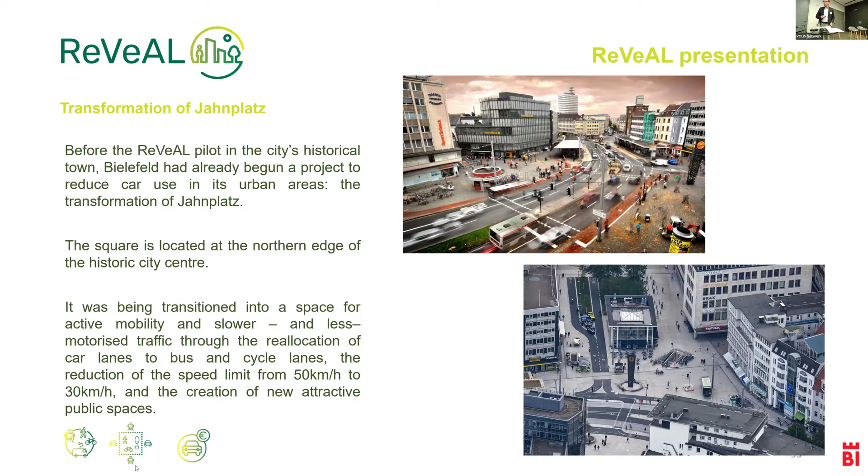The transformation of the Jahnplatz kick-started the transformation of Bielefeld's historic Old Town through a package of spatial intervention building blocks. Both the Jahnplatz and the Old Town projects are in line with the city's mobility strategy, which defines a sustainable model for the development of mobility in the city, and as I already mentioned, aims to reduce individual car trips from 51% share down to 25% until 2030.

The lessons learned in Reveal have given the city of Bielefeld a strong foundation to reach this goal.

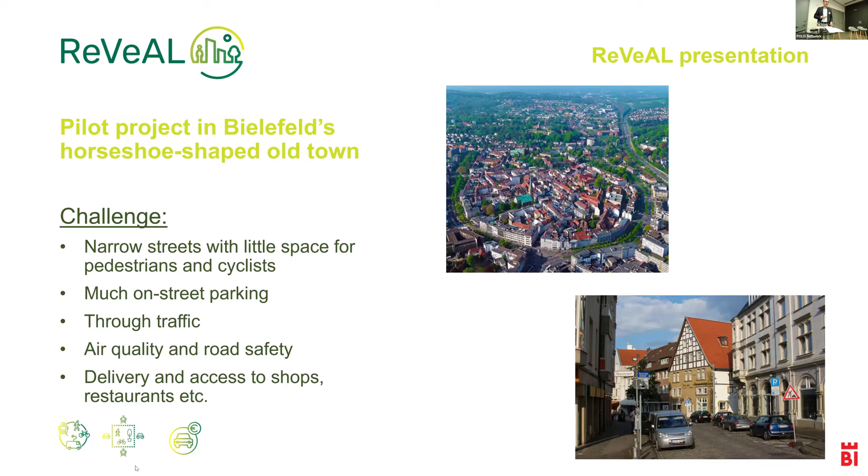The challenges in the Old Town are different from the Jahnplatz: narrow streets with little space for pedestrians and cyclists, very much on-street parking, through traffic through the Old Town, and air quality and road safety issues are very important there. Delivery and access to shops, restaurants, etc. are also very important impacts in the Reveal project, in our pilot.

What did we do? We did a very intensive data collection, coordinated planning, and extensive stakeholder engagement, and a thorough pilot project was implemented in Bielefeld's horseshoe-shaped Old Town within Reveal.

The core element was the participation process in Bielefeld. We started the project and involved all relevant stakeholders of the Old Town, such as the Chamber of Commerce, the retailers, the restaurant owners, and so on, and last but not least, the residents living in the Old Town and the people working there.

We invited them to work with us on a plan for how the Old Town can be changed and made more attractive, more livable, with less noise, less traffic, more green and more livability. Furthermore, we introduced our own project website to reach a wider public for ideas, critics, and feedback, and this in total was a very successful journey for us in the Reveal project.

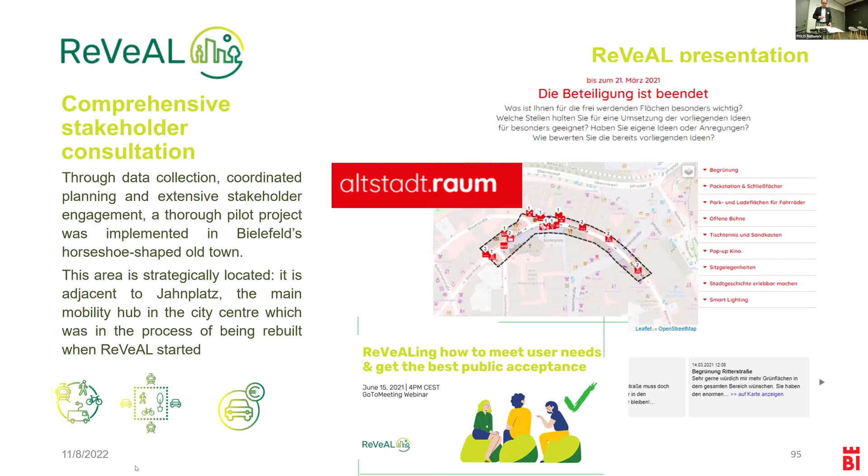Various measures for traffic management and the new use of traffic space were tested out during the testing phase from June 2021 until the end of February 2022. The relevant actors from the public sector, business, civil society, and also the politicians have been very closely involved in the development of the testing phase.

During the testing phase, we also made a lot of interviews with the people on the street. Of course, with the website, we get very intensive feedback from civil society, and with workshops with the stakeholders, we had a very intensive dialogue about the project itself. Here on the map, you can see the Old Town Horseshoe and the six different areas where we implemented different measures.

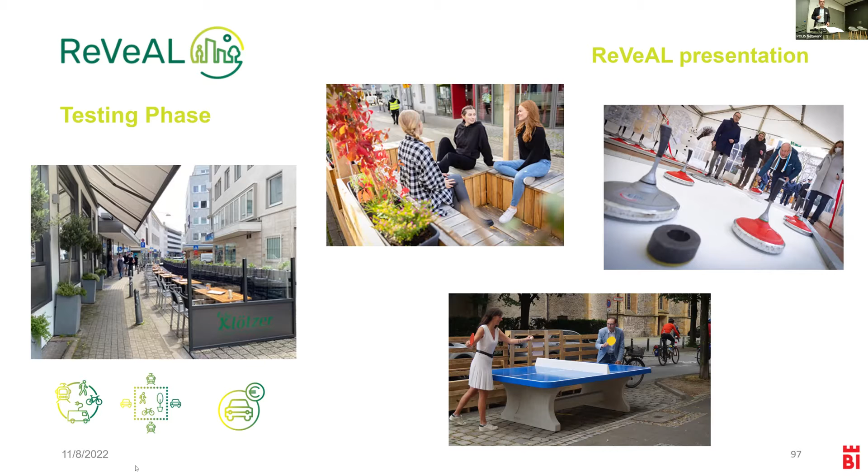Between 2021 and February 2022, several UVAR building blocks were tested in the Old Town, including the extension of a pedestrian zone, redesigned public spaces, reallocation of car lanes to cycling lanes, transformation of parking spaces for other uses - for instance, for seating, bicycle parking, sports, restaurant terraces, etc. - and the introduction of movable bollards to prevent through traffic in some streets. The goal of the pilot was to evaluate the impacts and acceptability of these interventions by the public.

Today, and when I say today, this is now the time after Reveal - the project is not stopped, it has not ended. Some people in Bielefeld believe or hope or think that it has been stopped and that it should be ended and will not continue. Even some people in the media have this opinion, but it is not the case.

I can tell you that we are strongly convinced to go on with our project, and we will start now the next phase - unfortunately after the lifetime of the Reveal project, but Reveal was the kick-off, the starting point for this development. Today, the city is using the results of the Old Town pilot to turn towards permanent changes and expand its UVAR measures.

So we talk not only about UVARs in the Old Town, but also in other areas of Bielefeld. There is an overall strong support from a lot of stakeholders, not all, but many, including restaurants, shop owners and road users, driven by the stakeholder-focused process, because this was the core of the project - to convince the majority of the people, the majority of the public, hopefully the media, also politicians.

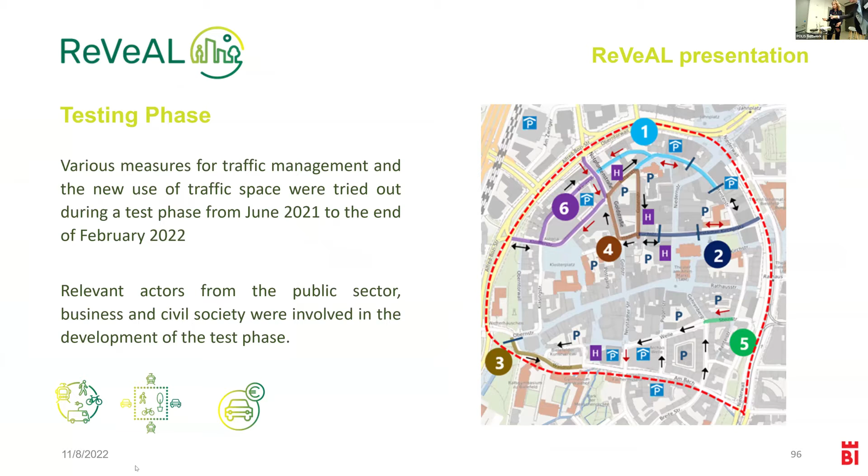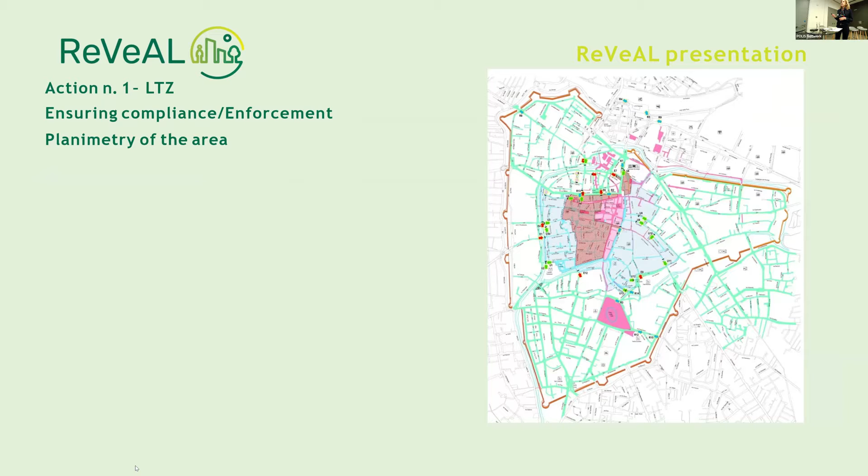Action number 1 regards the LTZ. We have a series of old rules begun in recent years, and these regulatory rules led to a range of subsequent and supplementary changes over time. This is the map of the reinforcement, the perimeter of the area of enforcement of gates in the historic center of Padua, and this is the current situation of compliance and enforcement.

We have studied and developed a draft of an innovative ordinance in our department, especially through the Reveal project staff, which led to the drafting of the innovative ordinance. This was very demanding work. Working tables were held with other sectors of the municipality: local police, environment, and territory. This was an important part of the demanding work, but at present the innovative ordinance is still pending.

Priority has been given to the installation of new cameras, shown in this picture, which not only serve to enforce the prohibition and access regulation in the historic center but will also provide data on traffic flows and vehicle typology, increasing the database for monitoring in the municipality of Padua. It should be pointed out that in our department there is a specific ZTL office with 8 people in charge who deal with this type of work.

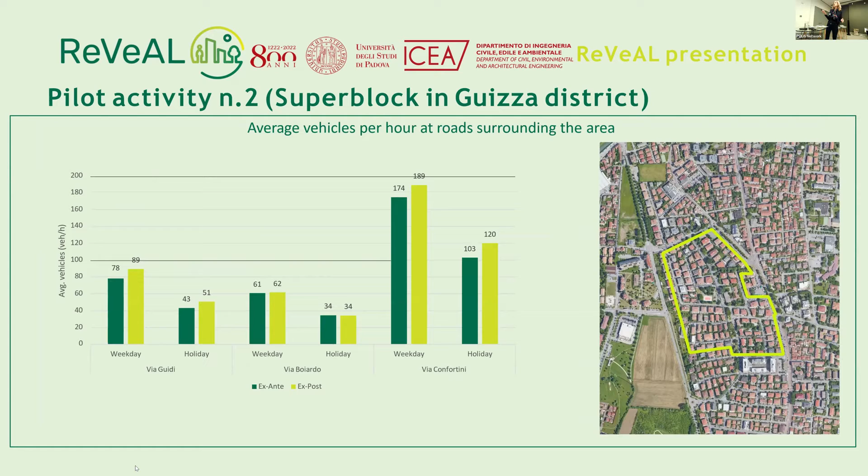This is another slide that explains what I am talking about now.

Finally, everything presented here corresponds to what we have learned with Reveal, and it reflects the thoughts of my colleague, Luca Cohen, and I'm glad to present it to you. And thanks, Laura, for having a sentence that I wrote some time ago.

Okay. Thank you, Raffaella.

Yeah, so another thing, it's true, we had one of the quotes that got pulled out. Whenever somebody said something really insightful, we usually wrote it down somewhere. We had our collection of really smart things that people said. One that came from Raffaella was talking about, we saw this earlier, all of these different departments coming together to work on this. And that was so beautiful because it just didn't happen so often. So just this idea that people were working together, isn't this great?

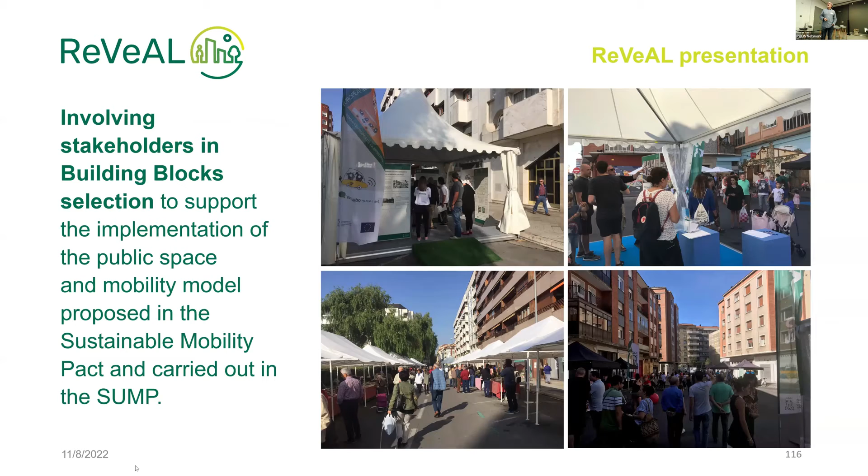From the very beginning, we tried to do it together with the people, trying to involve as many stakeholders as possible in order to select the different building blocks to support us in this transformation of the public space, according to the superblock approach.

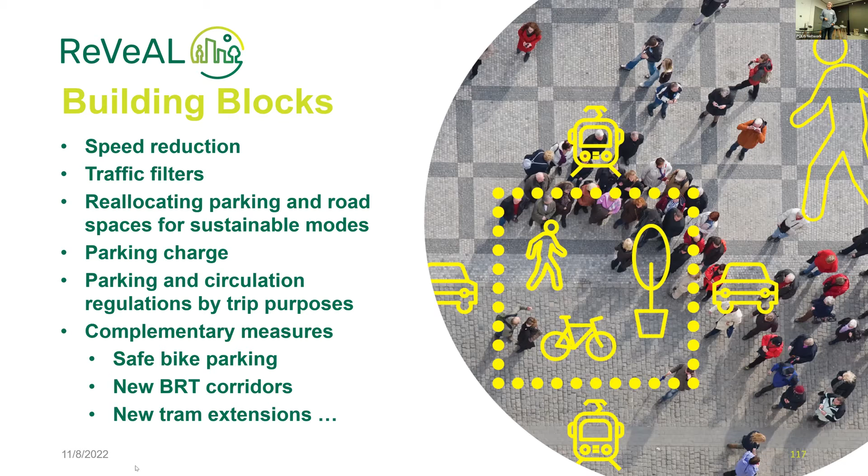Those are the different building blocks that we have tried to apply in the different pilots. We have worked within the project, from speed reduction, traffic filters, to different complementary measures like safe bike parking, a new micro-logistic hub, and so on. So we have a very extensive catalog of the different building blocks that are supporting us in this transformation of the city.

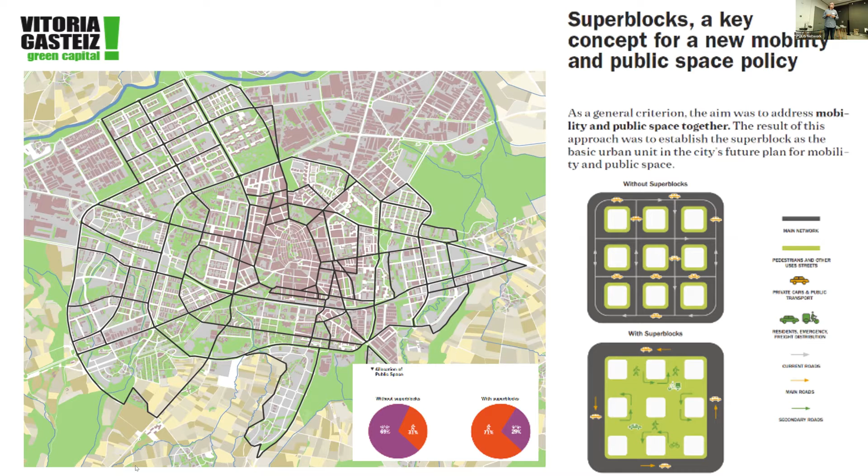What is true is that this is a long-term approach, so it takes long to make it a reality, but we have a clear idea of the city we wanted for the future. And always we have the opportunity to reclaim a street or refurbish the public space, because, for instance, we are implementing district heating in an area, and we have the idea of what should be the redesign of the public space in that area.

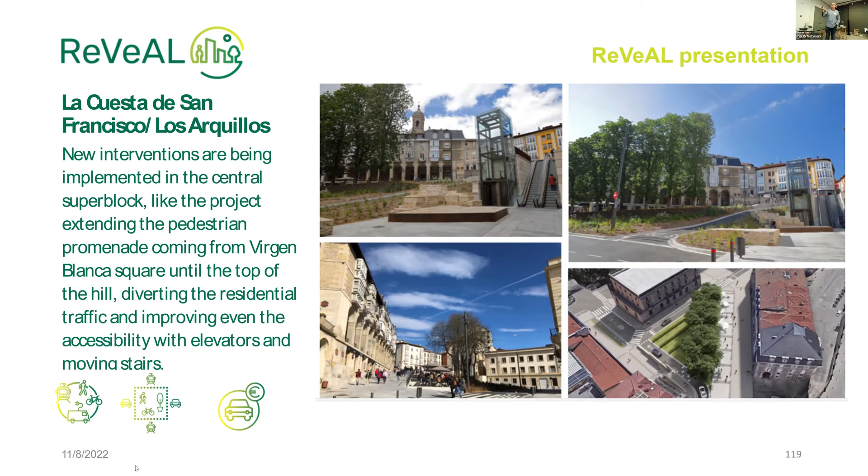And this is the superblock approach. The two first pilots we implemented within the project were this area in La Cuesta de San Francisco, Los Arquillos, to the south of the medieval quarter. This is the transformation, the situation after the intervention implemented in this part of the central superblock, extending the pedestrian promenade coming from the old square of the city, Virgen Blanca Square, until the top of the hill where the city was founded. This was a first phase of the intervention.

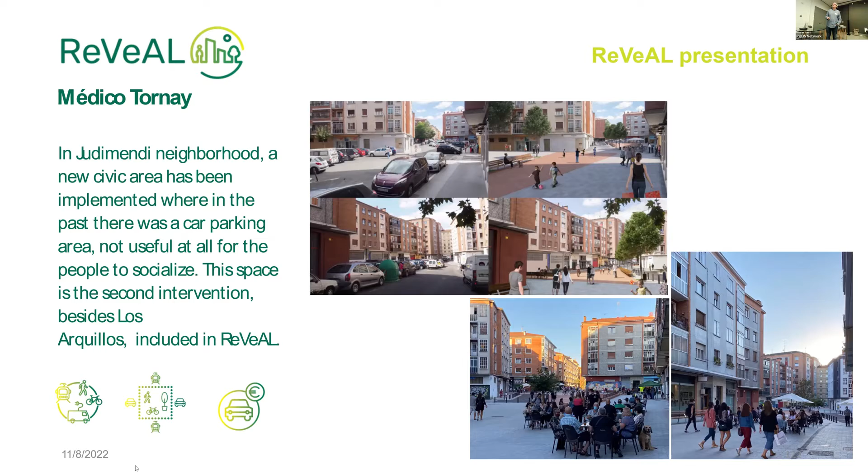It was also an opportunity to intervene through tactical urbanism approaches, trying to complement the fully structural new designs we implemented in the two previous examples. For instance, in areas where it was not possible to cancel totally the parking areas, it was possible to introduce some vegetation to modify the design of the street, to calm the traffic, and to allow those areas to have other functions apart from mobility.

And we know this is the starting point. If we succeed in reducing the number of cars registered in the city, it will be possible to go on and give more public space for people and also for nature and vegetation.

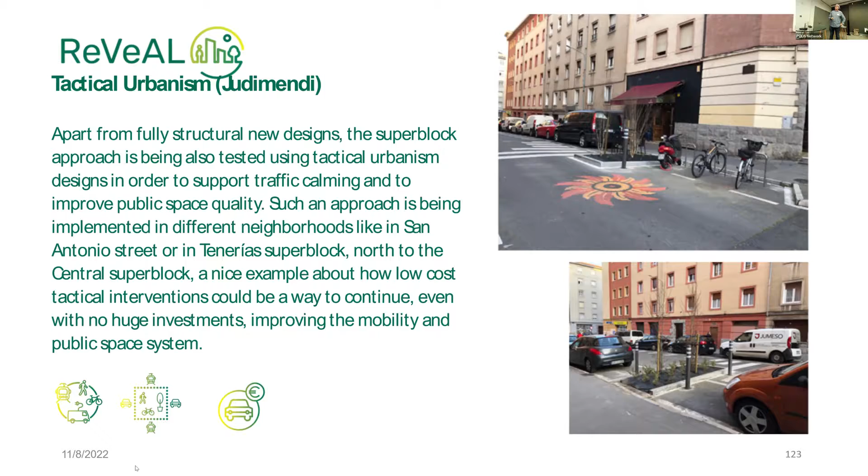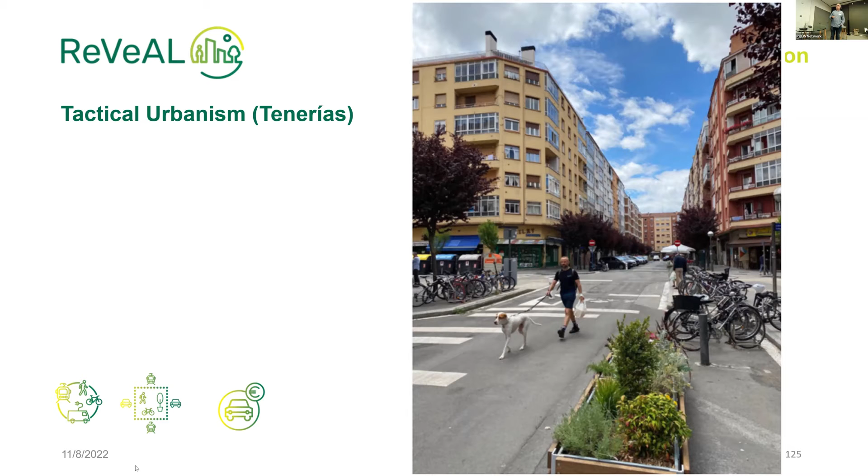Another example of this kind of tactical intervention in other neighborhoods, where it's not possible to cancel the parking areas, is with low-cost measures it's possible to change the environment in the area and give people a feeling that it's a space for the people instead of for the car.

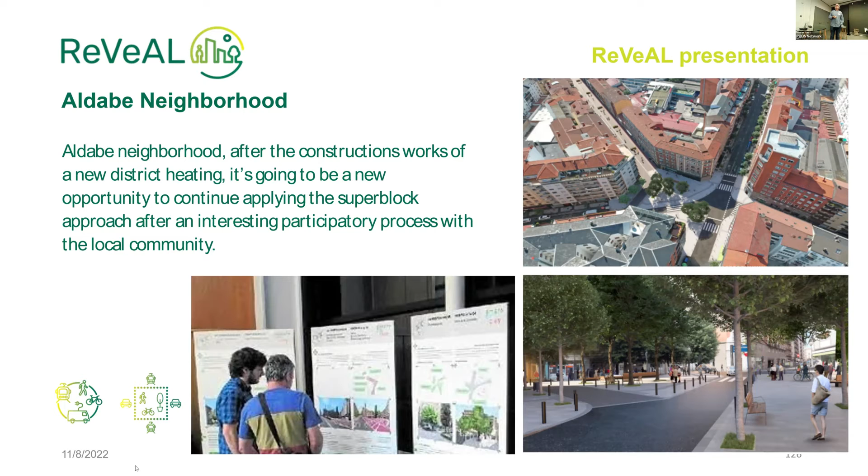So we are trying to implement livability enhanced zones, not low emission zones. This is the approach in the Aldabe neighborhood, another area where we have started this kind of intervention after the ReVeAL project and after the implementation of a new district heating network in the area, and after a really intensive participatory process with the community to agree with all stakeholders about the final design.

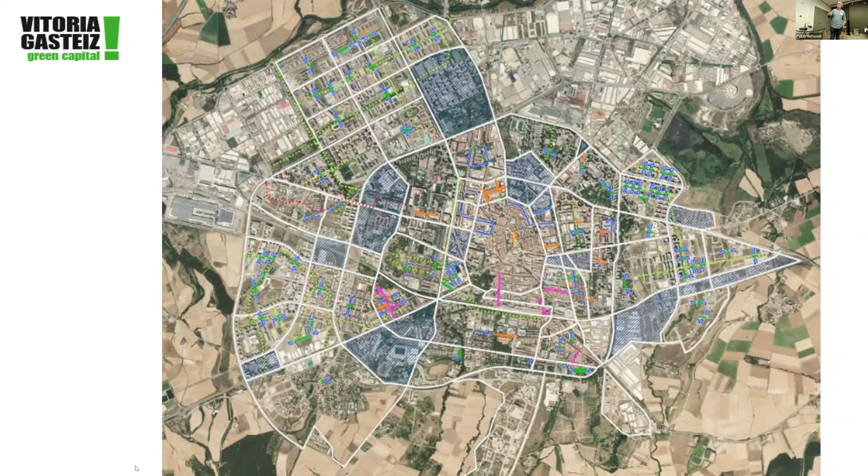This would be an opportunity not only to recover public space for the people and reduce the use of the private car in the city, but also to improve the green infrastructure and provide natural connections between the different superblocks and neighborhoods with the city surroundings, providing additional ecosystem services from the green areas, and transforming isolated green areas into a real green system in the city.

And that is only possible after the implementation of the superblock approach and after the reduction of through traffic and the use of the car in the city center.

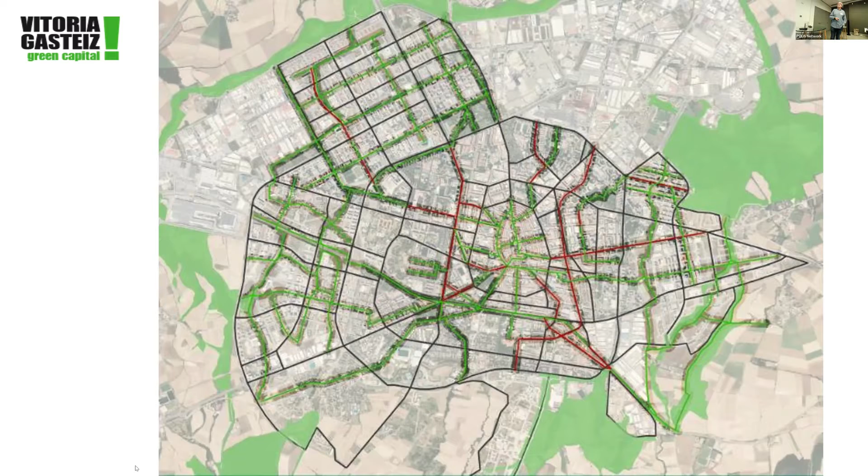Keep that one second. It doesn't work, and now, yeah, it's okay. Cooling the city as well.

This is a chance for the city to be prepared for the near future and for the really challenging future we are in front of. No, it's not the future, it's today.

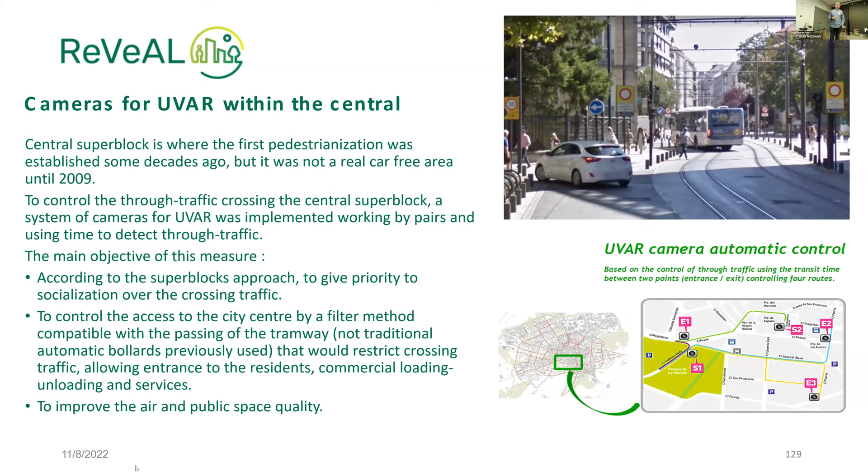And to conclude, during the last part of the project we had the chance to start working with another pilot that was not in our original participation in the project: the implementation of a low emission zone, because nowadays the national legislation in Spain demands all cities over 50,000 inhabitants to have a low emission zone implemented. The participation in the project and the support of the team, the different experts, friend cities, has been really helpful to have a proposal for discussion.

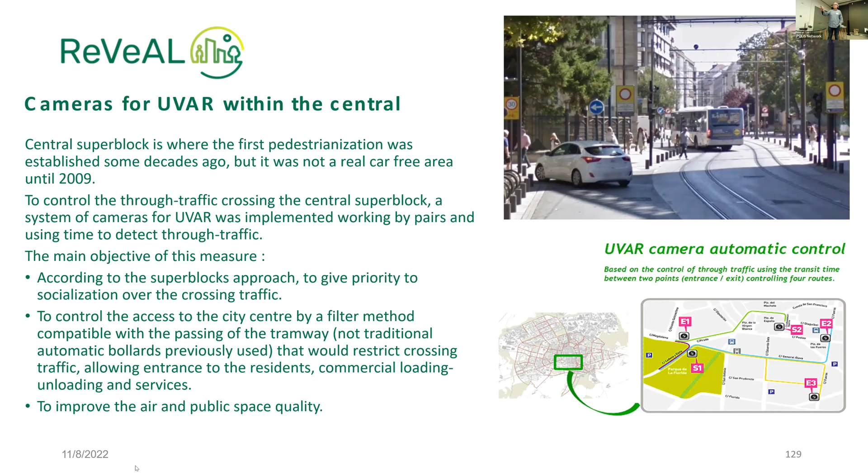We hope during the next year to have implemented the first phase of the low emission zone, starting with a residential priority area within the central superblock, supported with different additional building blocks and complementary measures.

This project is being funded by Next Generation funds, and participation in this project has been really helpful for us to have a winning proposal to get the funds from the central government and the European Commission, in order to continue working on this approach to become a real human-scale city.

There are different measures here: traffic access control in the area, extension of the parking regulated area. We also have, within the scheme, different phases for transforming the parking regulated area into one based on the environmental vignette, the environmental label. The idea is to extend the parking regulated area to all the superblocks inside the former ring road of the city.

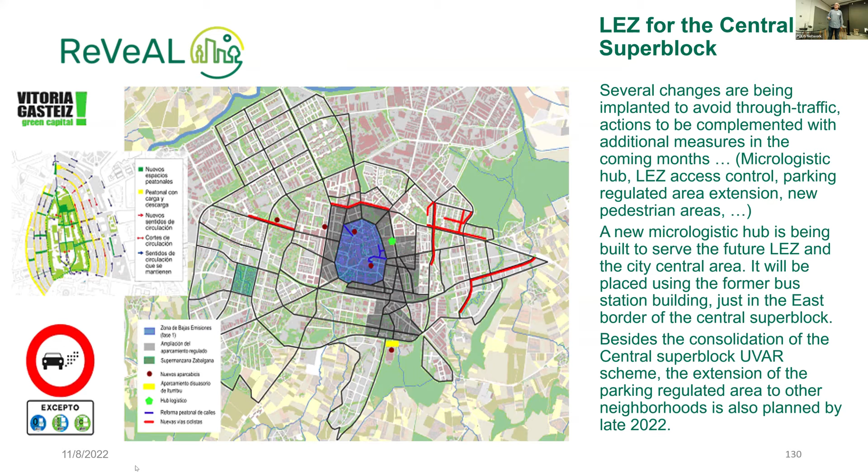To conclude, some complementary measures we are implementing include the extension of safe parking areas, a new underground safe parking space in the city center, and a new micro-logistics hub in the former bus station that we hope to start operating next year.

It's an 800 square meter building that is going to be refurbished to provide micro-logistics service to the whole medieval quarter and the surrounding superblocks. The idea is to try to consolidate in this space the services from different operators, so the last mile is served by only one operator.

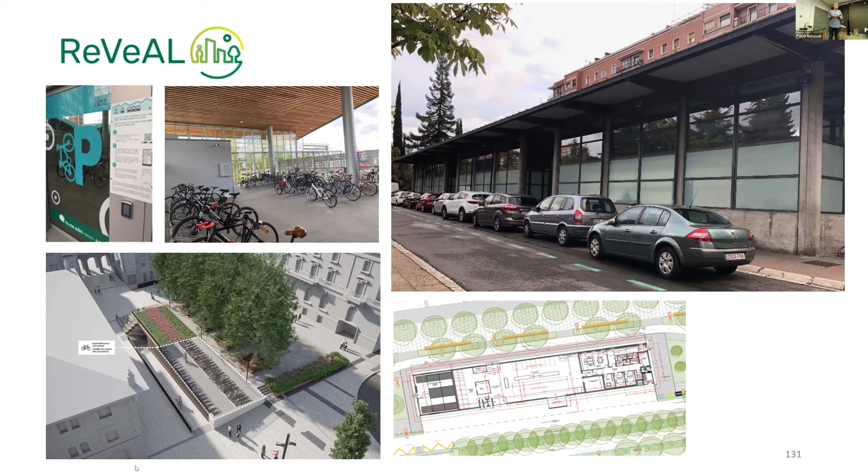That is the idea: to consolidate and optimize the last mile in order to avoid the invasion of vans in the pedestrian areas, the area we wish to give back to the public.